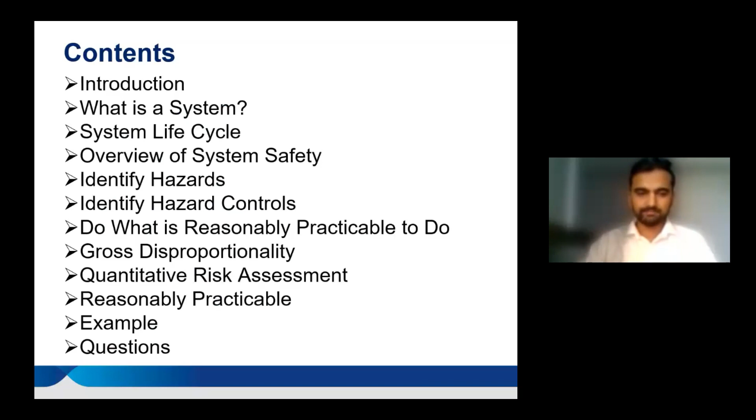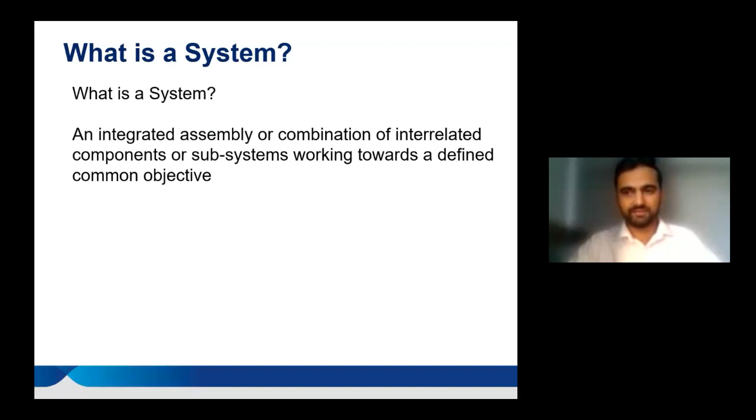And so, there we go. So the first question is, what is a system that we are talking about in this context? I guess it's really important that we understand what a system is. I've taken this from one of the textbooks, so I'm gonna read that out. The definition says a system is an integrated assembly or combination of interrelated components or subsystems working towards a defined common objective. So it's a combination of different subsystems that constitute a system.

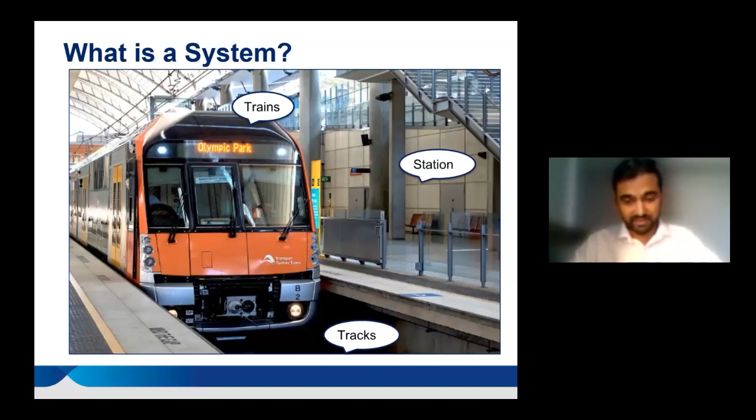So this is a train called the Waratah Series 2, which runs in the Sydney network. And I call it one of my trains because I extensively worked on this project. This train is parked at a station. So let's see what are some of the subsystems here that constitute a system. We can see the train is stopped at a station, and there are some underlying tracks, which you obviously can't see on the photo.

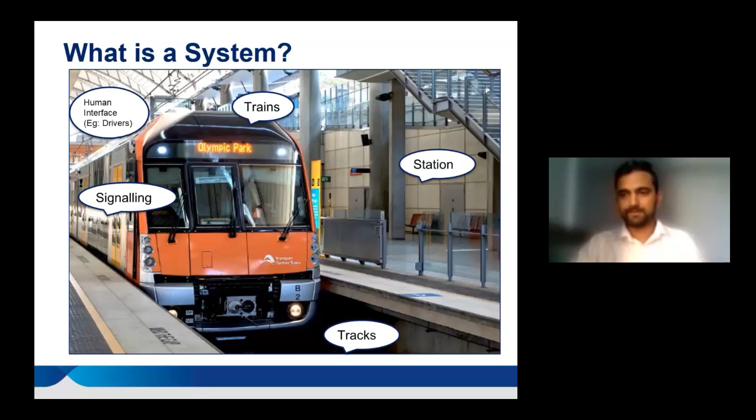And there are obviously the signaling systems, and there will be the driver interfaces and the human factors elements to it. And there are the other bits and pieces like the overhead wires and things like that, which all constitute a system. So these are all the subsystems involved in making a system.

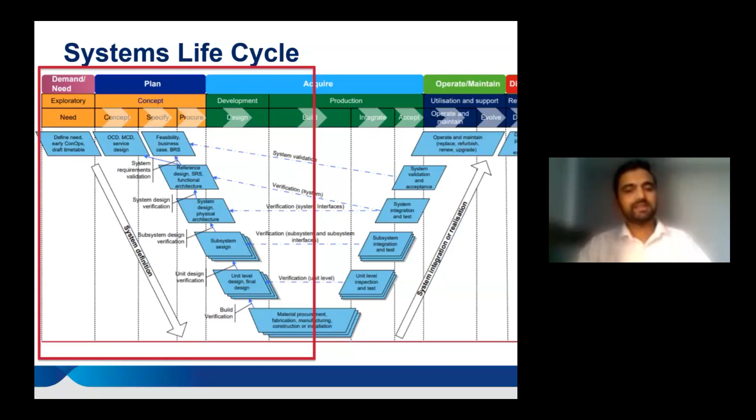So when we talk about system safety in design, we'll be particularly interested in the first phase of the project, mainly the planning and acquiring stage, where the majority of the design works will be happening. That is the phase with the best opportunity for any improvement to inherit the practice of safety in design. Otherwise, the costs are going to shoot up if we do the safe design after construction or once the project is commissioned.

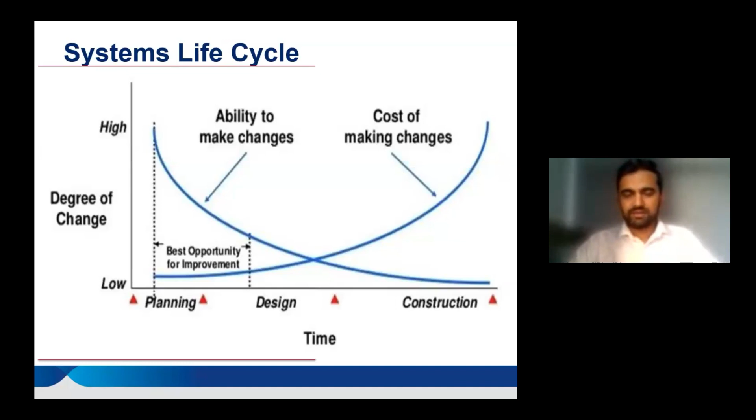So we talk about a lot of opportunity in the initial phase when the cost will be very low, and there will be opportunity in the design to incorporate any of the hazard controls as well. So let's go on to the next slide, and we'll see the overview of system safety.

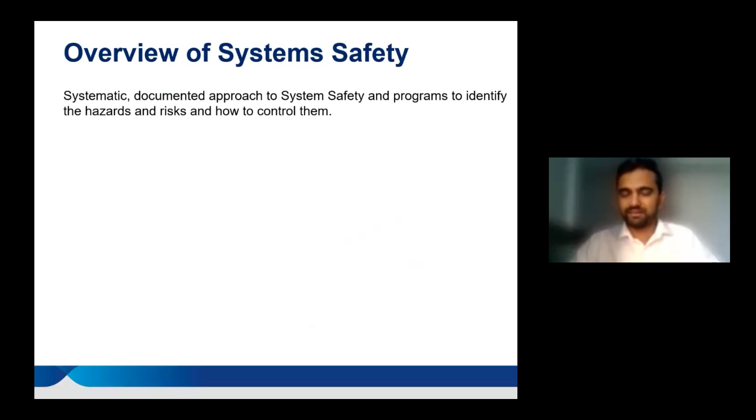So system safety: how do we ensure that the system is safe? It's an interesting question, isn't it? It's a systematic, documented approach to system safety and programs to identify the hazards and the risks and how we can control them. So when we have a risk, what we do first is a risk assessment.

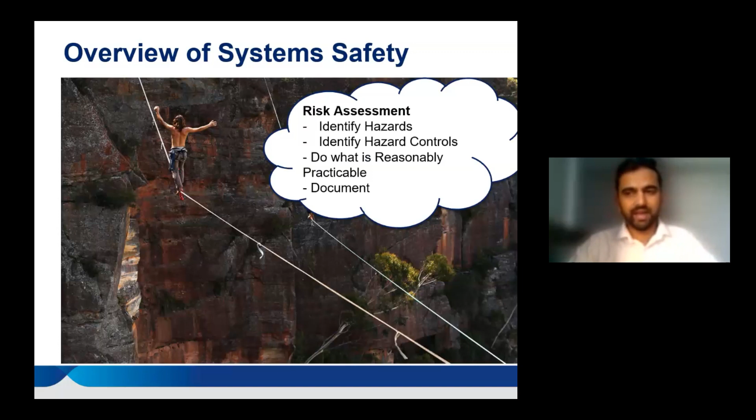And the third important step, which is often a debated topic, is to see what is the reasonably practicable thing to do to mitigate the hazard. And the final stage is documenting that, so that we have evidence of every activity that we are undertaking.

So let's go on to the first step, how we identify the hazards. Hazards can be identified in a number of ways, and the most important way is by engaging the stakeholders of that particular topic. For example, the stakeholder can be the operator, the human factors specialists, or the end users, a wide variety of them. Identifying the stakeholders is an important step.

We can also go through the database and the repository to find out if there are any existing hazards in place. And obviously user engagement: if you're delivering a rail project, there's going to be a mock-up in the majority of cases, and that's a good opportunity to establish the user requirements and the community impacts, and see if there are any potential hazards identified by that engagement.

And obviously there are standards and guidelines available, and it's good practice to look at the standards, verify that we meet them, and see whether any of the hazards are effectively controlled. It's also good practice to look into previous example projects and see how they have implemented the hazard controls, or how they have mitigated risks.

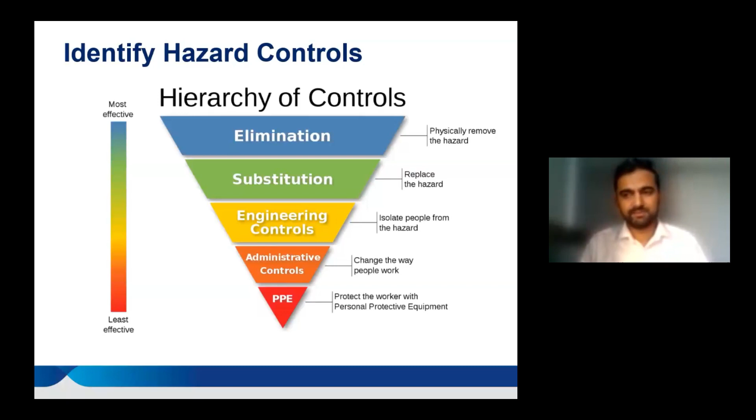So now we go to the third step of the risk assessment, which is doing what is reasonably practicable. So what is reasonably practicable? The definition says: that which is or was at a particular time reasonably able to be done in relation to ensuring health and safety, taking into account and weighing up all relevant matters, which include the likelihood of the hazard or risk concerned, and the degree of harm or severity that might result from the hazard or the risk.

So the likelihood and the severity define the risk. Then what the person knows, or the duty holder's responsibility about the situation, in terms of the hazard or the risk and the ways of eliminating it, or if it's not possible to eliminate the risk, what the possible options are to minimize the risk.

Next is to check the availability and suitability of ways to eliminate the risk. And the last one is to see if the cost is grossly disproportionate to the risk. So the cost is not just disproportionate to the risk; it is grossly disproportionate to the risk.

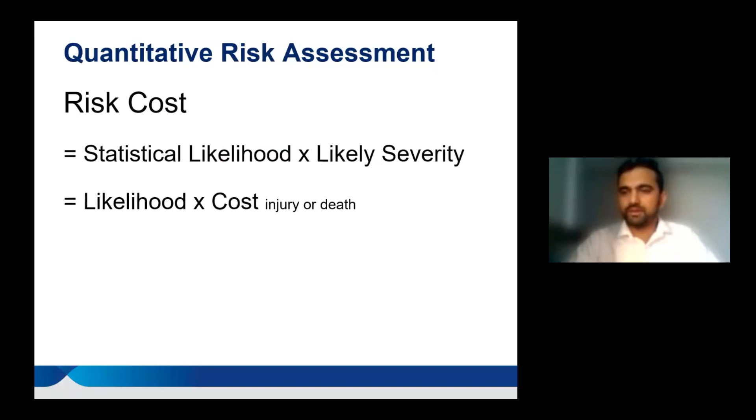And now we go to the quantitative risk assessment, or a systematic way of doing the risk assessment. It's an interesting topic where many people get confused. So what is the risk cost? The risk cost is technically the statistical likelihood multiplied by the likely severity, which in other words is the likelihood times the cost of the injury or death of a person from the WHS perspective.

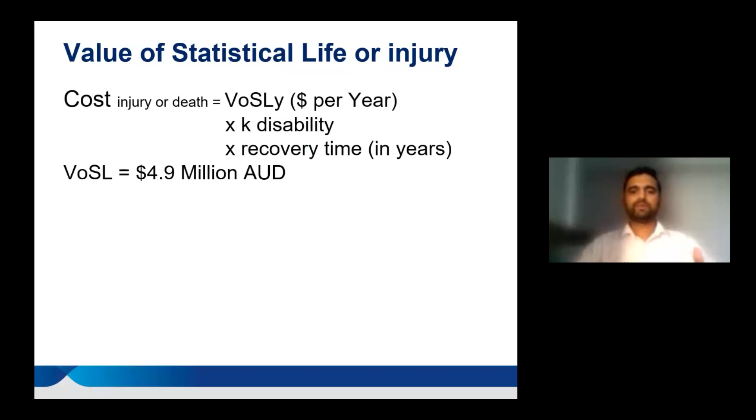So what is the value of statistical life? I have to put a disclaimer here. What I'm presenting here is purely in the Australian context. The value that has been put on a life is 4.9 million in Australia. That would obviously vary based on the socioeconomic performance, the life expectancy or the GDP of a particular country. So 4.9 million is generally considered acceptable in Australia, and so the cost of the injury is the 4.9 million.

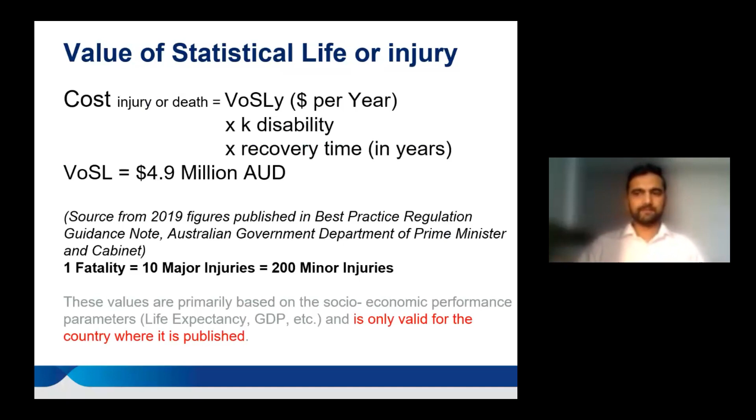And where did I get this figure? The figure I'm quoting is from the Department of Prime Minister and Cabinet's guidance note, published in 2019 in the best practice regulation. So one fatality is 4.9 million. If there was a real accident with 10 major injuries, it's considered as one fatality, so we have to divide the 4.9 million by the number of injuries. And 200 minor injuries are considered as one fatality. We'll see details about that in the coming slides.

So we talked about the gross disproportionality factor here, which is purely based on the user type or the likelihood or the consequence. It's a thumb rule that for the general public a factor of 10 is always used, and if it's a trained worker, a factor of 3 is used.

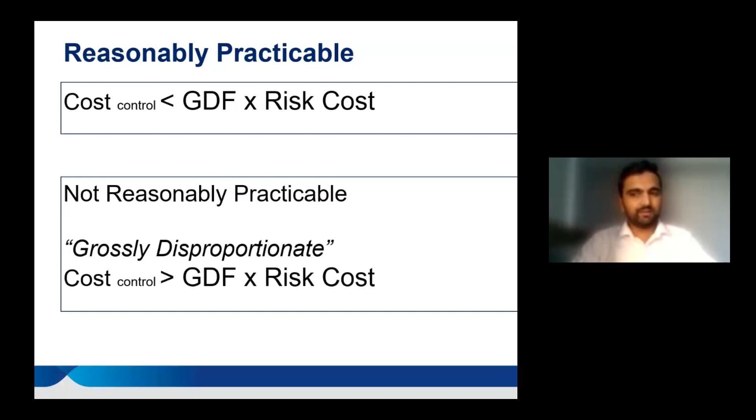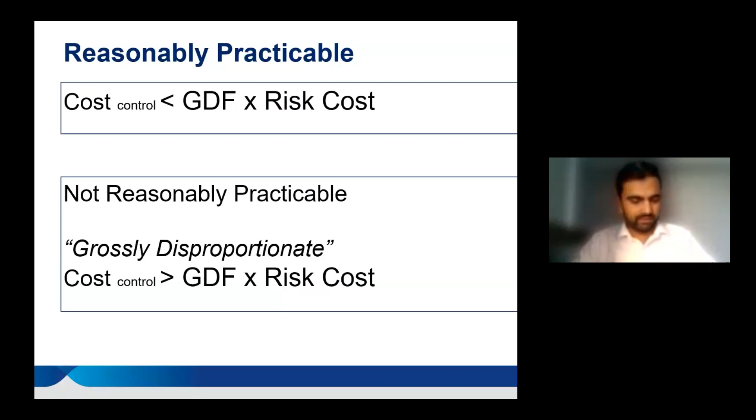So the interesting topic will be what is then reasonably practicable to do. We have identified a control in the risk assessment, and if the control cost is less than the risk cost multiplied by the gross disproportionality factor, then it's obvious that we have to implement the control. If the cost is way higher than the gross disproportionality factor and the risk cost, then it would not be reasonably practicable. So it's important that we do the right thing in the design so that the controls are in place.

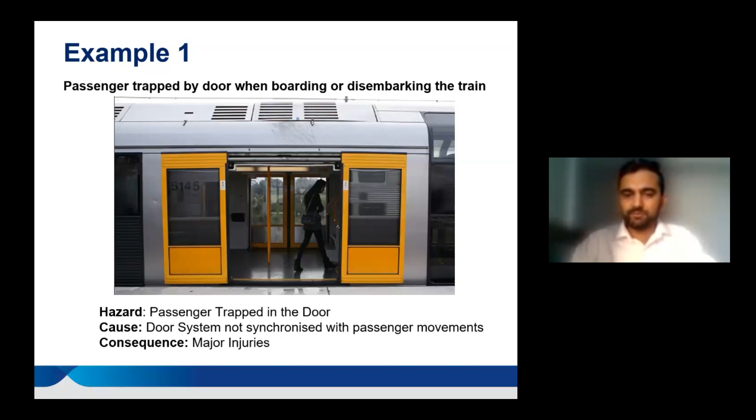So first we list out the hazards. The passenger being trapped in the door is obviously the hazard, and the cause would be the door system not being synchronized with the passenger movements. There may not be adequate controls in place, maybe an engineering control or some administrative control. The consequence would obviously be major injuries. If someone is stuck between the doors, they'll have some level of major injury. And let's also assume that the life of this asset we are going to design is 30 years.

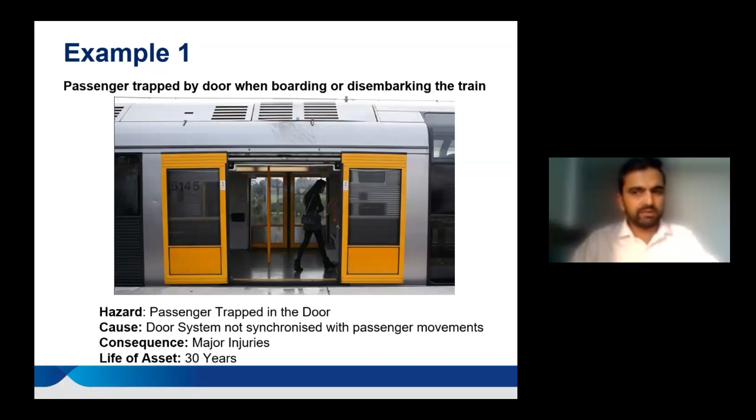Let's go into some details of the calculation and see what the control costs are here, and what controls we can put in place. Obviously, a control we can put in place is obstruction detection, such as sensors or software upgrades on the door system, so that the door control unit is alerted when a passenger is obstructed, and if there is any obstruction, the doors don't close. That could be one of the controls.

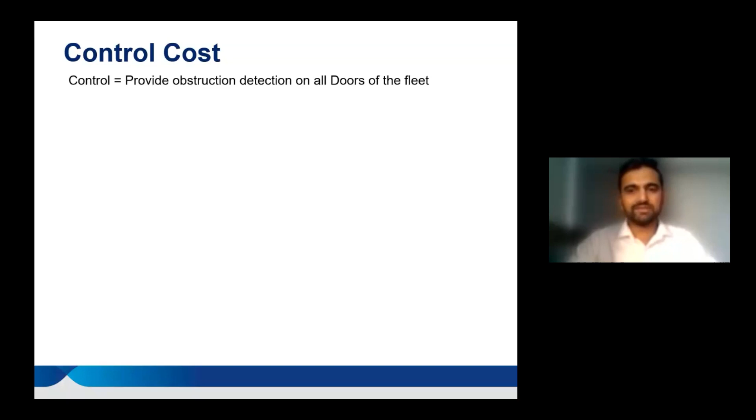And let's see what the cost for that control would be. I'm assuming that the cost for implementing that on the fleet will be 2 million at the design phase, and for the 30-year life cycle, roughly around 0.5 million. So the total control cost is now 2.5 million. And let's see what the safety benefit cost is that we are going to achieve.

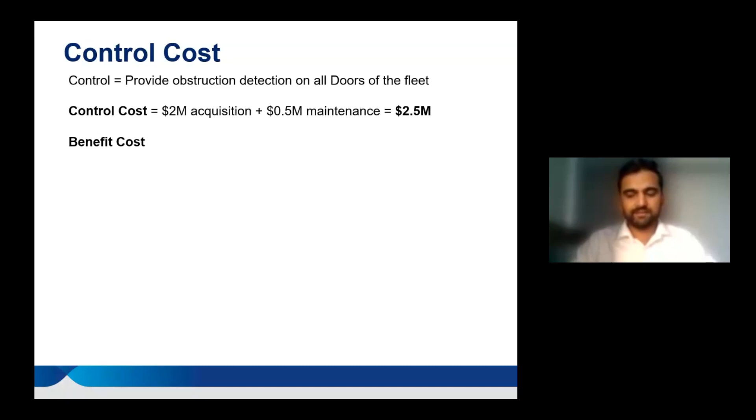So the consequence of this hazard is going to be that we'll definitely end up in a major injury. For one major injury, the value of statistical life divided by 10 would give 490,000, because for one fatality it is 4.9 million, so one major injury is 4.9 million divided by 10. We are assuming that 10 major injuries equal one fatality, and 200 minor injuries also equal one fatality.

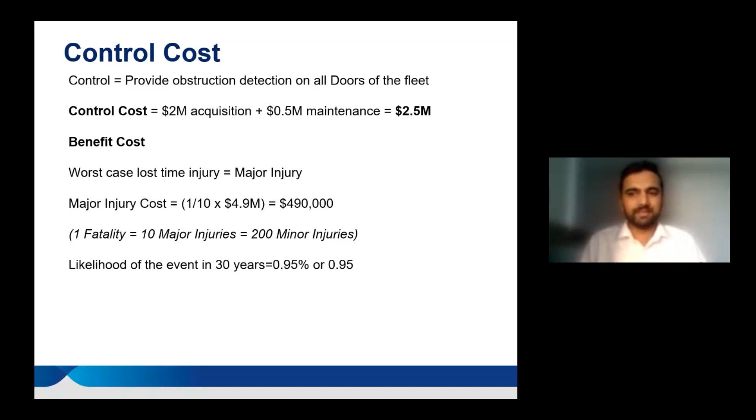In this case, we are assuming that there will be one major injury for one instance, and the likelihood of the event in 30 years, let's say, is 95%. We can't assume that it's 100%, but let's make it a very conservative figure that 95% of the time when the train runs in the network, it's likely that this event could occur. And the risk cost now is the likelihood into the severity, which is 0.95 into 490,000. So we get 465,000 as the risk cost.

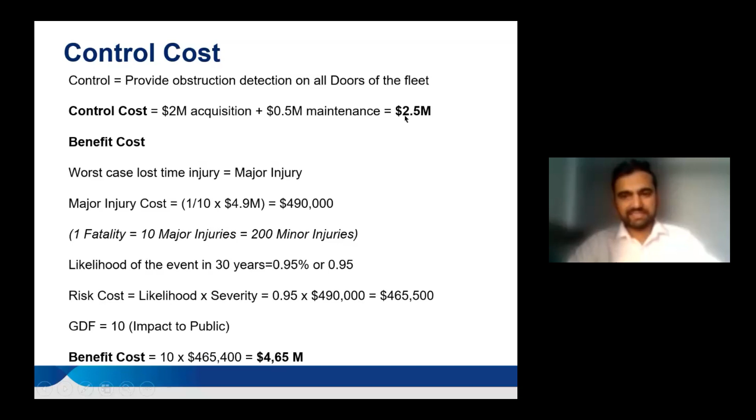So it's definitely impacting the public. As we described in the previous slides, the situation needs to be analyzed in favor of safety. So we are assuming a factor of 10 because it's impacting the public. So the safety benefit that we are receiving is 4.65 million against the control cost. It's pretty obvious that we have to implement the control. We have to have some obstruction detection in place, because there's no way we can argue that the cost is grossly disproportionate, and it's a reasonably practicable thing to do.

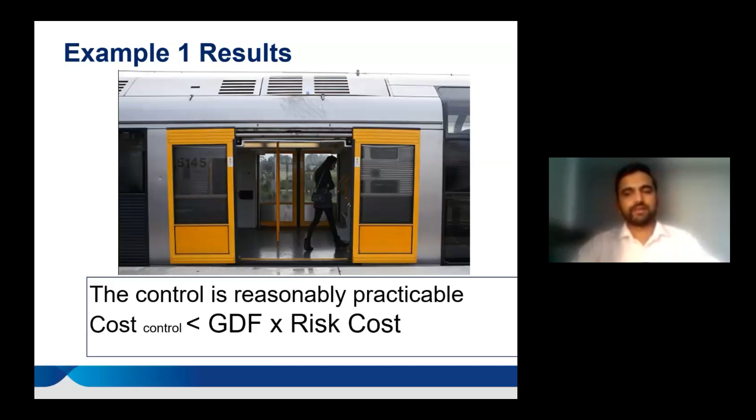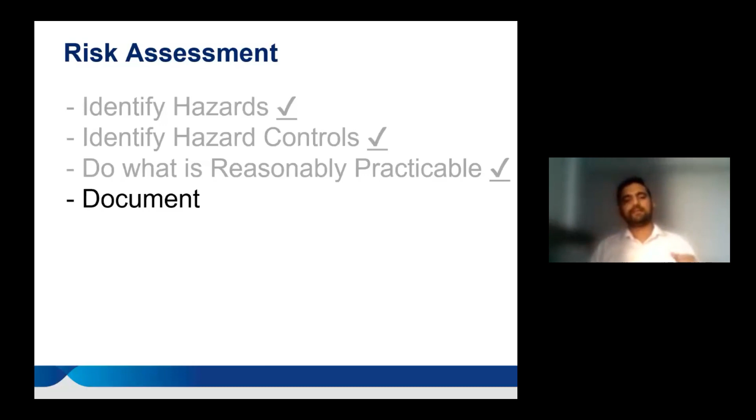So that is the example where we have seen how we can use quantitative risk assessment in a real life scenario. And with that, we have ticked three boxes. We have identified the hazards, we have identified the controls, and we now know what is the reasonably practicable thing to do. And the final step is to document it.

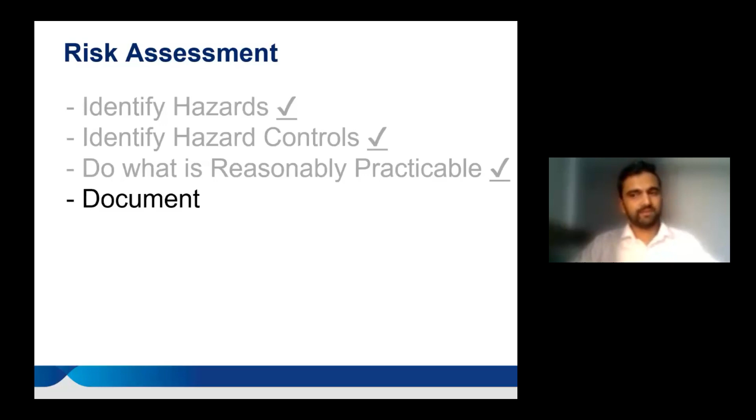The risk assessment, or the reasonably practicable test, which is called SFAIRP in the Australian context, is a legal requirement. In the UK, it is called ALARP, which is close to the SFAIRP concept anyway. So it's a legal requirement. If we end up in an accident, and if we have not designed appropriately in a safe manner, there's a good chance that we end up in court. And if we have not documented this process, it's a huge risk that one is going to take as a duty holder or as a designer.

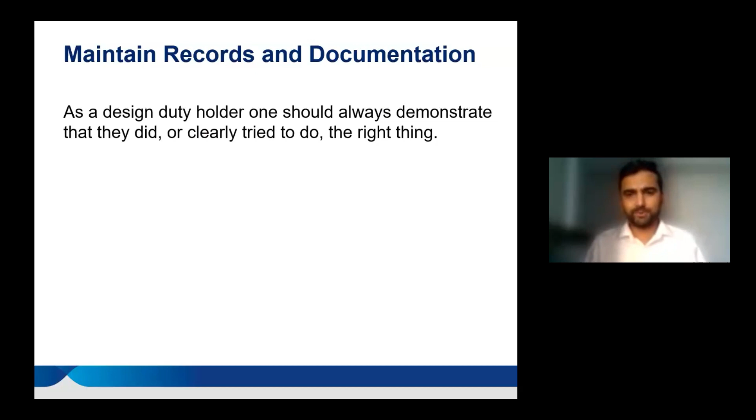It's most important that the record keeping and the documentation is proper. It has to be very clearly demonstrated, at the point of time when we do our risk assessment, the hazards or the controls which we have mitigated, or that in many cases we could only minimize our risk because the cost is disproportionate, which would be the right thing to do at the right point of time. But we have to do all of that, and we have to keep the evidence of the hazards list, the hierarchy of controls, what controls have been analyzed, and how we came to a conclusion on what was the reasonably practicable thing to do.